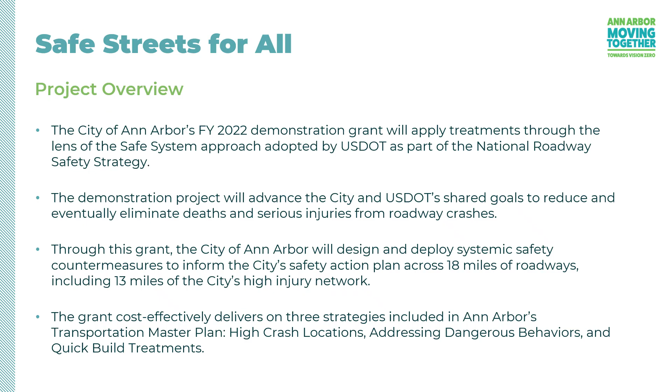This grant program advances three key strategies from Ann Arbor's transportation plan: safety improvements at high crash locations, addressing dangerous behaviors, and implementing quick build treatments. The types of street changes being advanced by this program include safety improvements consistent with established best practices and that have been used and tested previously by the city.

These include pavement markings, signage, and delineator posts that reinforce posted speed limits and lead to more predictable and consistent driving behavior, pavement markings that increase the visibility of different roadway users to each other, particularly around high conflict areas like intersections, pavement markings and delineators that indicate appropriate travel paths, such as hardened center lines that prevent unsafe turning,

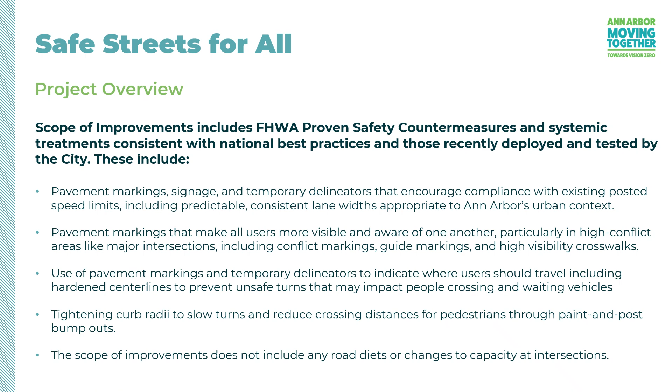and paint and post bump outs and other features that tighten corners and slow turning speeds while reducing crosswalk distances for pedestrians. These changes do not include road diets or other changes that affect intersection capacity.

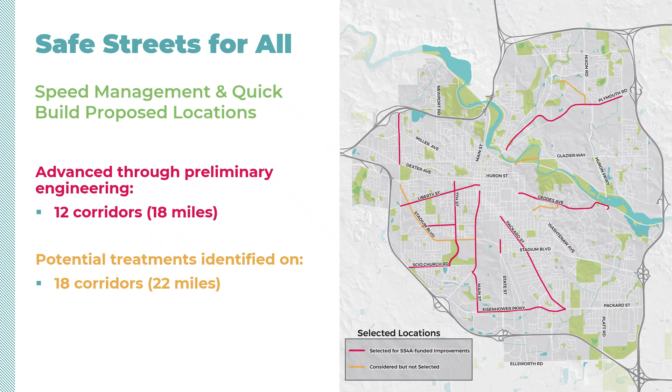Through the earlier phases of this project, 18 corridors totaling 22 miles were considered for SS4A funded improvements. Based on alignment with available funds, priorities, and in consideration of other roadway safety projects, this was narrowed down to 12 corridors totaling 18 miles, along with 11 key intersections along these corridors. Note that this map only shows the corridors and not the included intersections.

Next, we'll talk a little about the project's process, timeline, and community engagement work. This project started in the fall of 2024. The project team selected projects to advance for implementation, and preliminary design plans were put together for agencies to review. We're currently working through the federal granting process to get projects ready for implementation.

This includes finalizing the project design, awarding construction contracts, and then building the improvements. We anticipate that a portion of the designed projects will enter construction next year. Following construction, there'll be a year-long evaluation period to assess the impacts and outcomes of these projects.

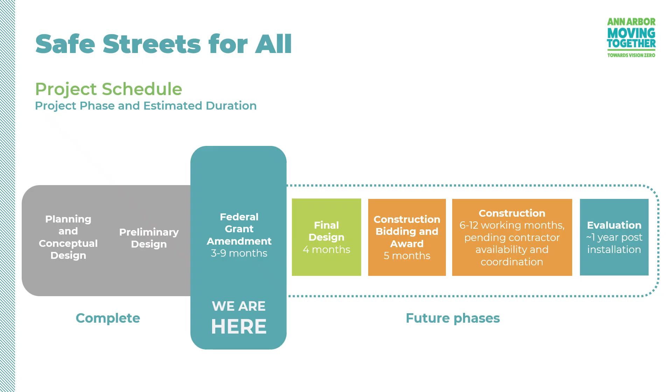Engagement has been a critical component of the Safe Streets for All program. The focus throughout has been to build on the foundation established through the Moving Together Transportation Plan, as this established many of the strategies and priorities through extensive public engagement. For the SS4A program, and given the implementation-focused nature of the work, engagement has emphasized communicating with the community about the timeline and what can be expected in terms of physical street changes.

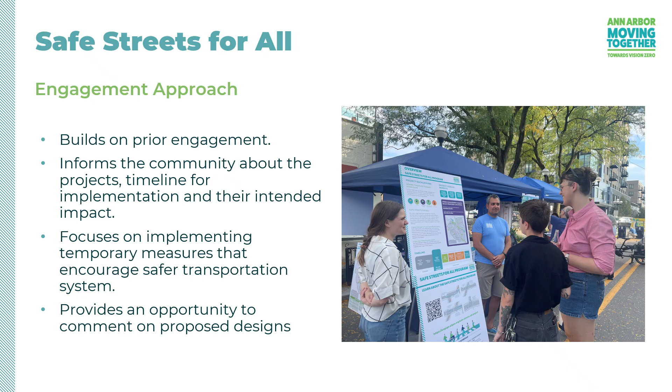The engagement process provides an opportunity for the public to comment on proposed design solutions, ask questions, and gain a deeper understanding of how the program works and its intended outcomes. We completed phase one of community engagement earlier this year. Engagement focused on educational and explanatory materials about the project. Virtual office hours were held, a project website was developed, and a survey was circulated.

Some of the common survey themes included broad support for quick build treatments to address safety concerns, a desire for more transformative safety improvements on road corridors, and confirmation of public concern around safety on the corridors identified for improvements through this project.

Next, we want to share more specific details about quick build treatments and speed management tools that are being deployed through the Safe Streets for All program and advanced into implementation. So what are quick build projects and why is this a key part of the SS4A program? Quick builds are street projects that utilize relatively lower cost treatments like pavement markings, signage, and surface mounted elements like delineator posts or rubberized speed bumps that are already used across the city.

These treatments are cost effective and faster to implement compared to reconstructing the street with permanent hard materials. However, while less expensive, these treatments are still an investment and require funding for installation and maintenance. Let's look at the specific types of treatments being used in this program.

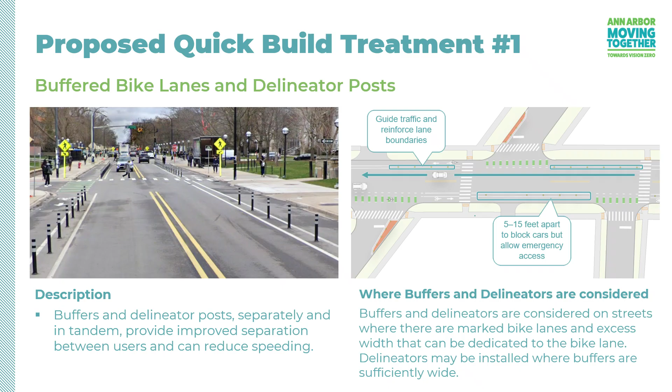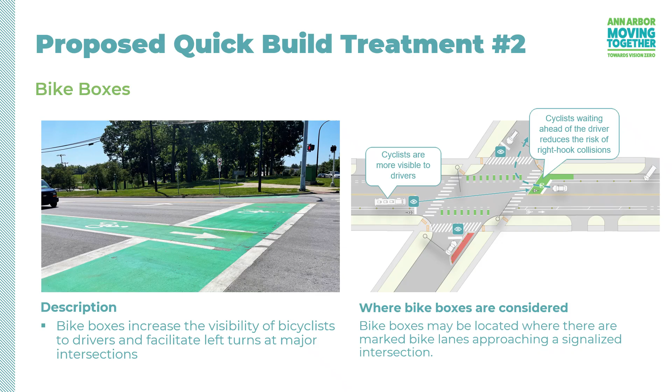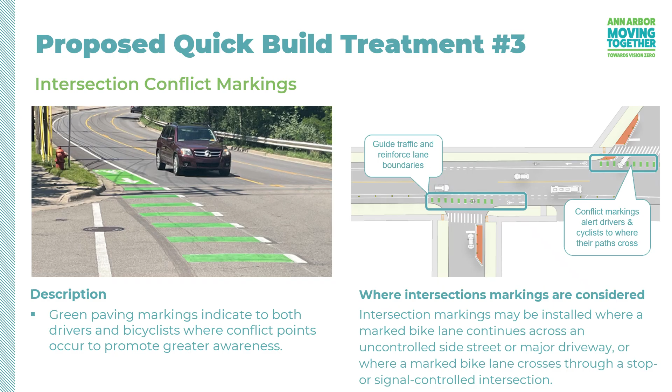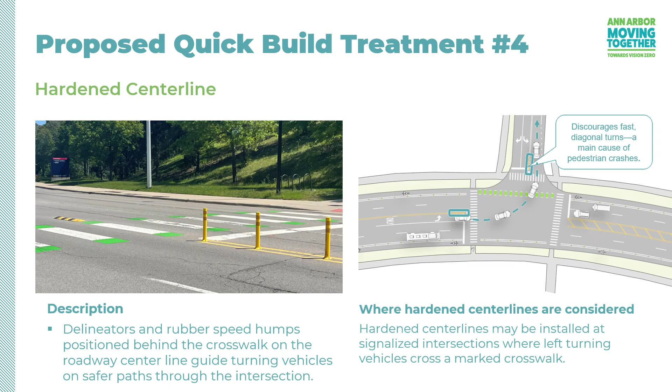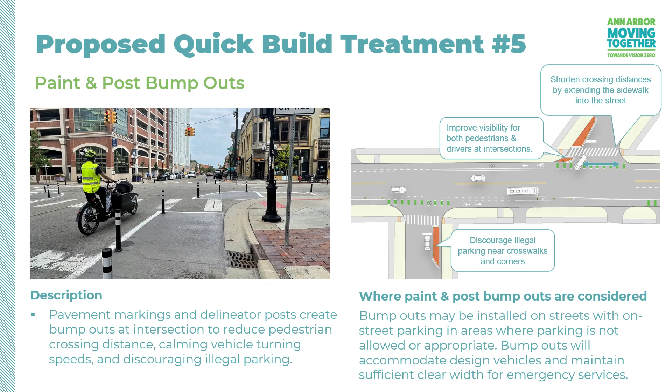These treatments are used where on-street parking or loading zones are present. The exact design will accommodate access for emergency vehicles. The example here is showing some of the paint and post bump outs along Washington Street downtown.

For our last topic in the presentation, we will look at proposed project corridors and some of the specific recommendations. First is how we arrived at the selected project corridors. These were all focus corridors from the Moving Together Towards Vision Zero transportation plan. Next, corridors are ranked based on their level of potential improvement, crash analysis findings, and the need score from the city's speed management framework. Projects were prioritized based on how many of these three criteria were met, and further refined through an iterative process that considered other construction work and capital projects and how improvements would tie into overall mobility networks, like the city's system of bike lanes. It's important to note that more locations were identified for improvement than there are available budgets to implement.

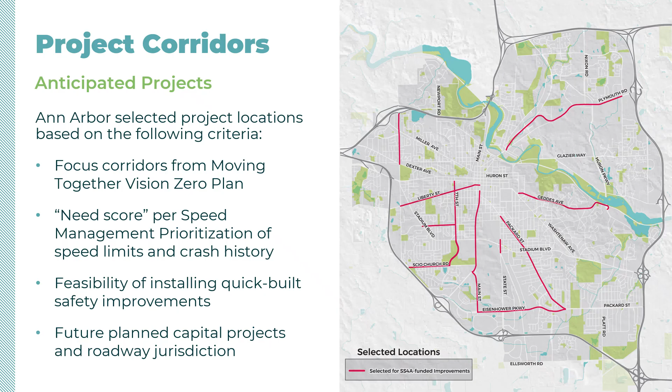As for the specific SS4A projects, this is the first page of the projects that are listed, and I will walk through each of these briefly. Along Packard Street from State to Eisenhower, it's proposed lane narrowing, bike lane buffers with delineators, additional conflict markings, and paint and post bump outs on side streets. On Liberty Street from Maple to Main, there's a westbound bike lane, conflict markings, side street paint and post bump outs, bike boxes, and hardened center lines.

On State Street from Granger south to Simson, bike lane buffers and delineators, conflict markings, side street paint and post bump outs. On Maple Road from Dexter to M14, delineators will be added to existing bike lanes, conflict markings added, and side street paint and post bump outs. On Main Street from William Street south to Eisenhower, lane narrowing and addition of bike lane buffers and delineators, down to Ann Arbor Saline Road to Eisenhower, addition of delineators to existing buffered bike lanes, conflict markings, side street paint and post bump outs, and bike boxes at Stadium, Scio Church, and Pauline.

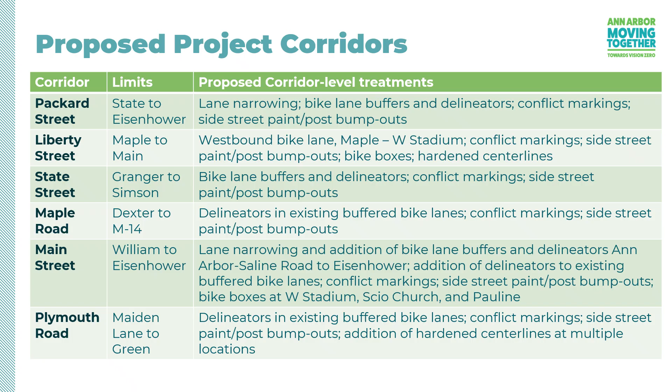Lastly, on Plymouth Road from Maiden Lane to Green, delineators will be added to the existing bike buffers, conflict markings will be added, side street paint and post bump outs, and hardened center lines at multiple intersection locations. For the last set of projects here on page 2, we have Eisenhower Parkway improvements from Main to Packard. There'll be lane narrowing, upgrades to the bicycle facility, median turnaround markings, conflict markings, and hardened center lines at multiple locations.

On 7th Street from Scio Church to Washington, delineators will be added to the existing buffered bike lanes. Conflict markings will be added, side street paint and post bump outs and bike boxes. On Scio Church Road from Maple to 7th Street, delineators will be added to the existing buffered bike lanes. Conflict markings will be added, side street paint and post bump outs and bike boxes. On Pauline from Stadium Boulevard to 7th, delineators will be added to the existing buffered bike lanes, conflict markings will be added, side street paint and post bump outs and bike boxes. And then lastly, on Geddes from Washtenaw to Huron Parkway, conflict markings, side street paint and post bump outs, and hardened center line treatments.